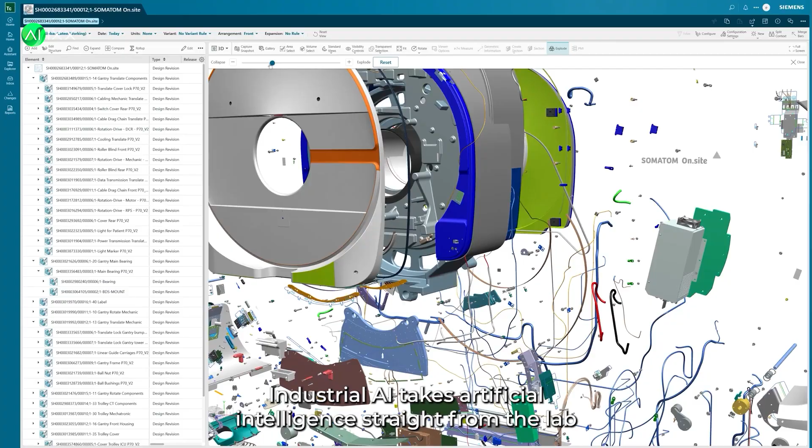Andrew Xiao from Pegatron explains it perfectly: industrial AI takes artificial intelligence straight from the lab to the assembly line. How does it work? Through incredible digital twins, ultra-realistic virtual copies of complex products, enabling companies like Siemens to design, predict, optimize, and validate new innovations, all before a single physical piece is made.

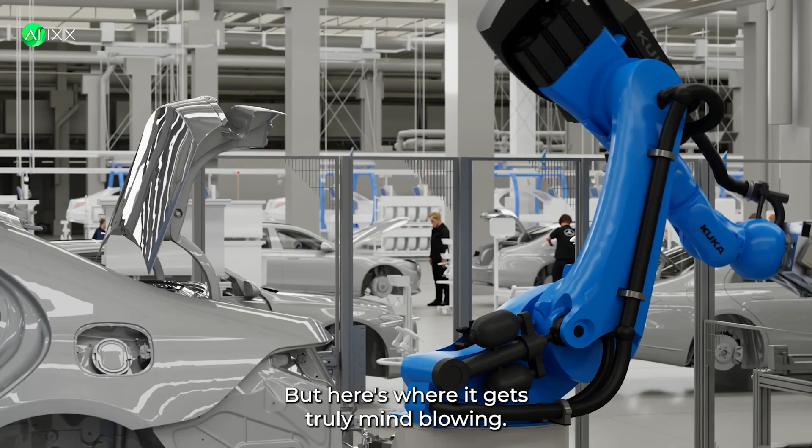But here's where it gets truly mind-blowing. Jean-Claude Ercolanelli at Siemens introduces Agentic AI, which acts like a virtual engineering assistant. It can sit next to a design engineer, even one without simulation expertise, and help set up complex simulation problems and analyze the results. Imagine AI guiding you through intricate product design.

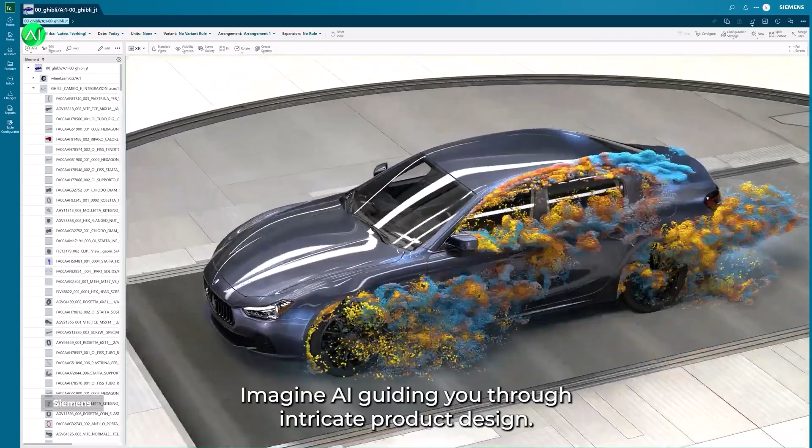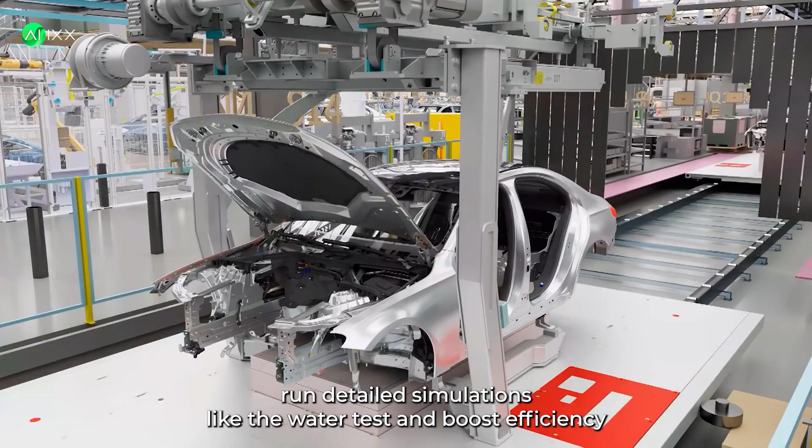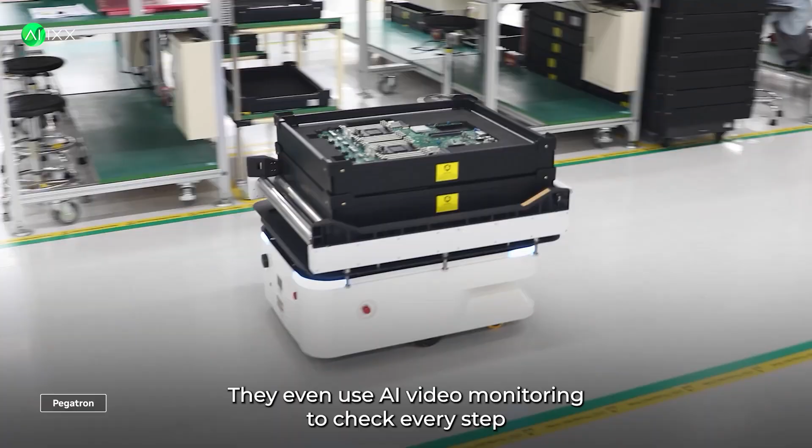Now companies are integrating this across their operations. Using the Industrial Metaverse, they're applying industrial and agentic AI to automate processes, run detailed simulations like the water test, and boost efficiency. AI agents at Pegatron are helping engineers perfect designs and optimize factory operations. They even use AI video monitoring to check every step of an assembly line, providing instant, invaluable insights. Notice the pass and fail flags? That's AI vigilance. This powerful combination within the Industrial Metaverse ecosystem allows for unprecedented validation and optimization.

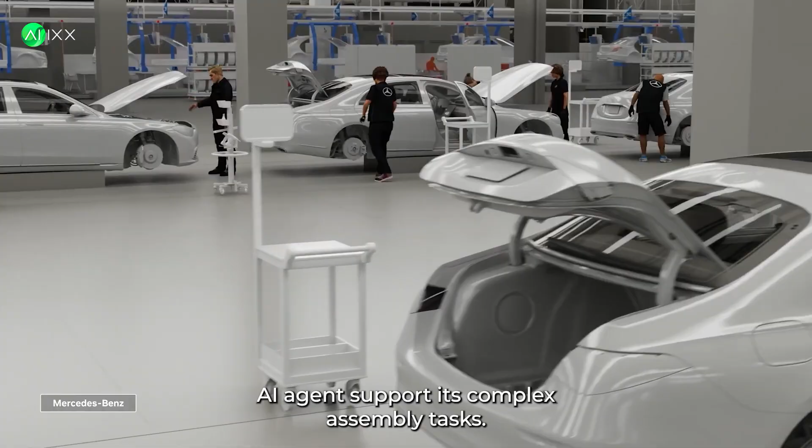Look at this humanoid robot. AI agents support its complex assembly tasks. As Dr. Geisel from Mercedes-Benz says, it lets their teams collaborate with these AI agents intuitively, just like working with human colleagues. This is truly pushing the barriers of production engineering.

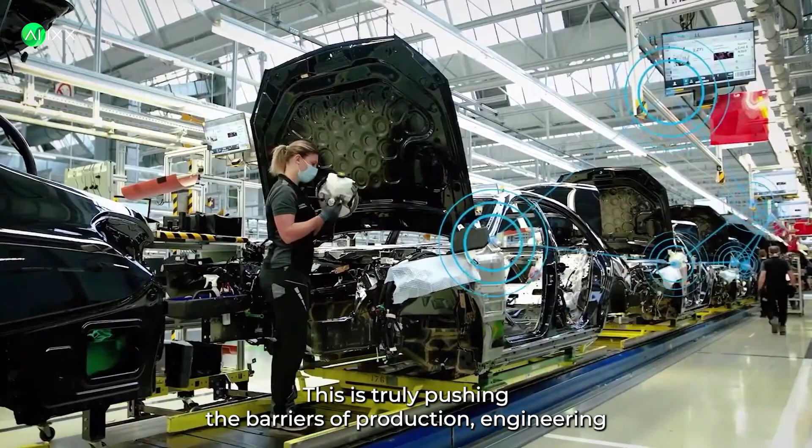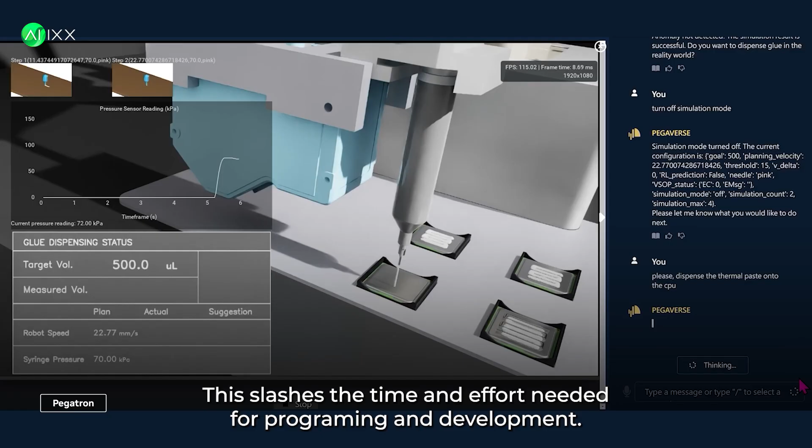With metaverse technology and AI, robots can learn new tasks and improve their performance autonomously. This slashes the time and effort needed for programming and development. It scales to massive projects too, enabling lighter, stronger, and more reliable designs faster.

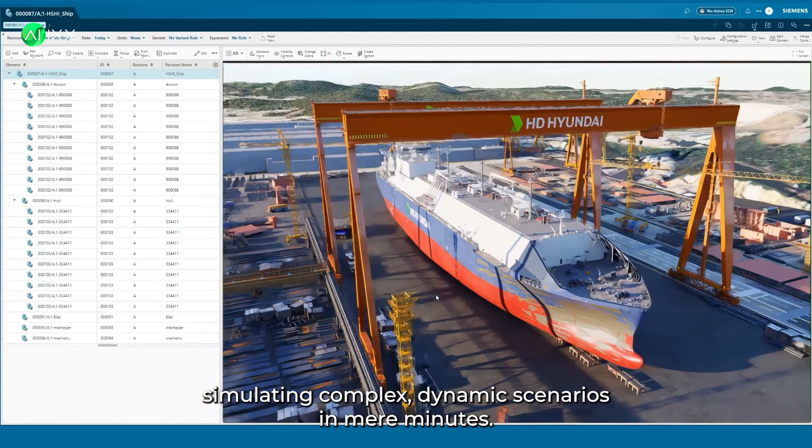Here's a concrete example of the impact. Using NVIDIA technology to plan this virtual factory cut construction time by over 40%. It's a groundbreaking capability, simulating complex dynamic scenarios in mere minutes, leaving behind the days or weeks it used to take.